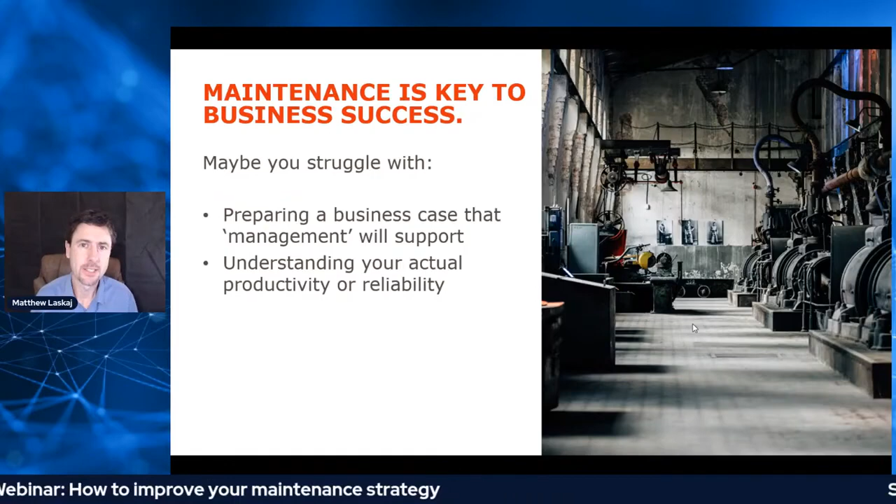So today we're going to talk about the importance of maintenance. We all know that a key to business success is having a good maintenance program, a good reliability program, or good strategy. Maybe you struggle with a few areas though - maybe it's getting the business case that management will support so you can set up your strategy. Maybe it's actually understanding how productive you are as a business or how reliable your equipment actually is. What I often find is people just don't know where to start. Starting can be the hardest part, so hopefully today's session will help you out with some of those things.

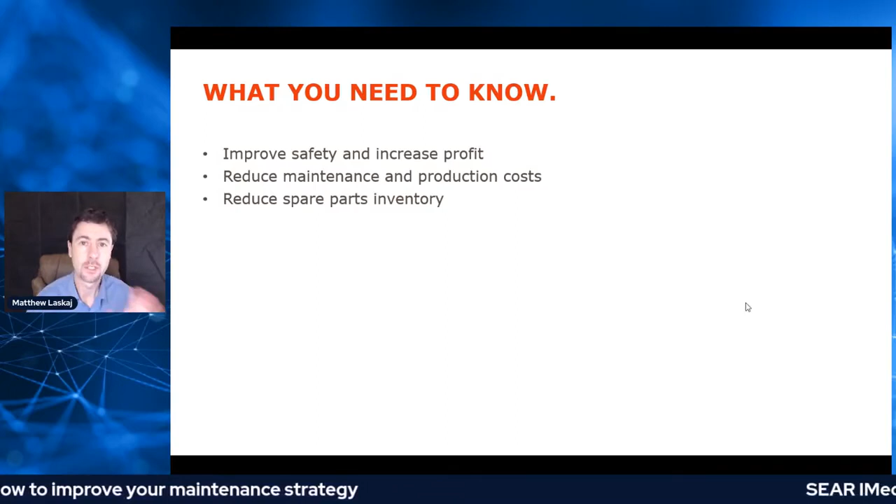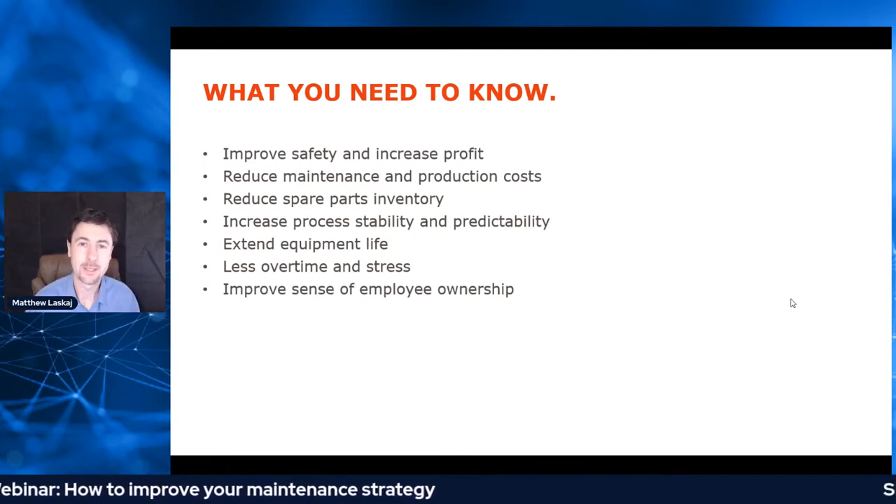The whole basis behind improving maintenance and reliability is you want to improve safety and increase profits, because if you're not increasing your profit, you don't have a business. You want to reduce your maintenance and production costs and also reduce your inventory - the more equipment you've got sitting there, the more it's costing you. So cost is a big driver of improving your maintenance. You want to improve stability and predictability of your equipment, because you want to know when you think it's going to fail or when the work has to be done. You don't want to be caught short. So we want to extend equipment life. Of course, we all want less stress in our life - overtime and unplanned work makes more stress, so improving your strategy will reduce your stress. And by getting a sense of employee ownership, it's important that workers feel like they're part of the team, feel like the equipment is theirs.

So there are two key areas I want to focus on: what are the building blocks or fundamentals of maintenance plans and maintenance strategy, and then how do you use that knowledge to build your own plan? Throughout the next 45 minutes, I want you to think about this question: what are 3 steps or 3 pieces of information that you get out of today's seminar that will help you master your own maintenance and reliability plan? I'm going to give you my 3 at the end, but I want you to think about the main 3 things you take away from today that you can put into your own maintenance plan.

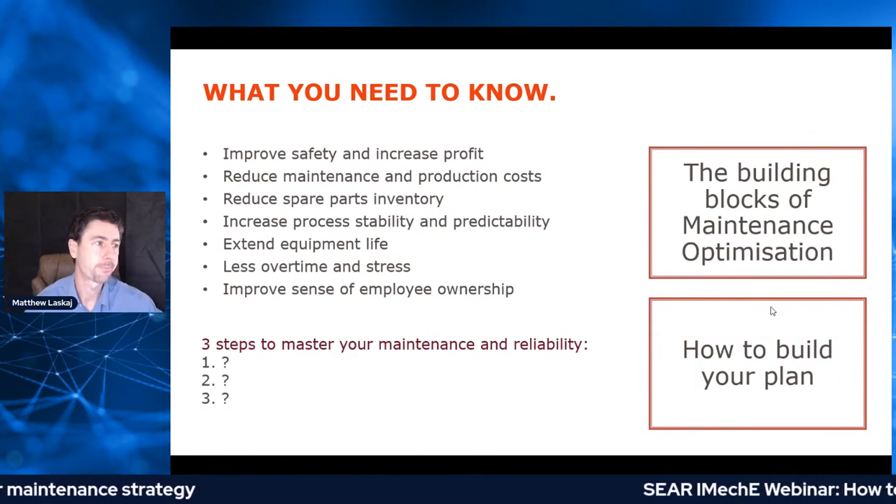First, have a think about the place where you might work, or somewhere you've worked in the past. Something breaks down, and for whatever reason, it's quite often on a Friday night or a weekend, or sometime when you don't want it to happen. All of a sudden, you've got a breakdown.

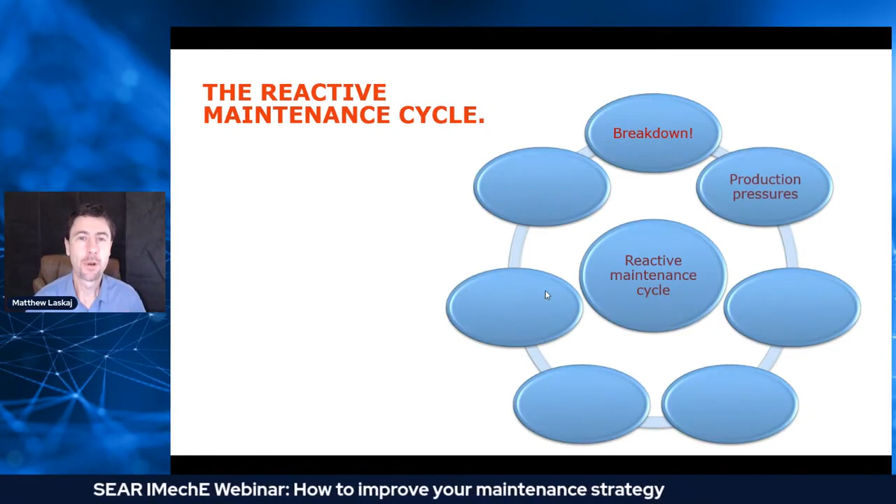Production's on your back to get it fixed. We need to get production out the door. We're losing money, get it fixed. Quick, quick, quick.

So the maintenance team do a really temporary fix, what we call a Band-Aid fix. They put a plaster over it, fix it quickly, get it up and running as quickly as possible.

So that makes them stressed. They're overworked because things happen at the wrong times and they're stressed trying to get it fixed quickly. That means the standards drop. They don't do work as well as what they could if they had more time and were planned better.

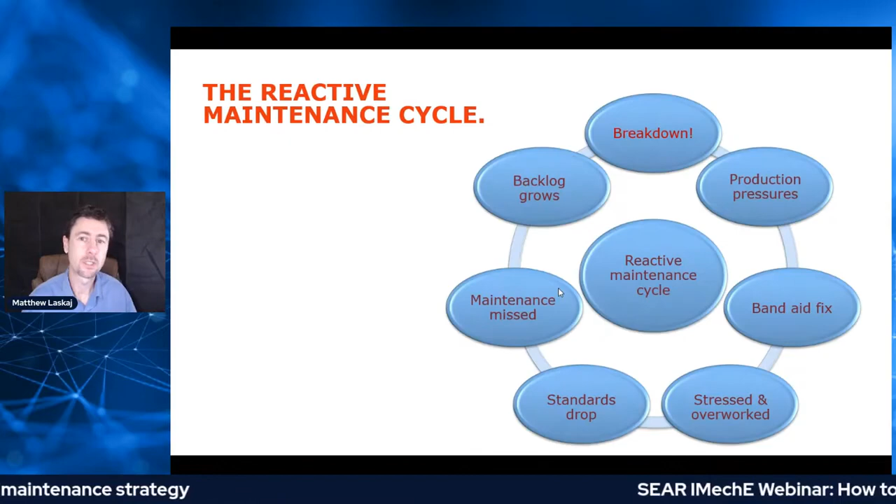And maintenance then gets missed out because you're spending all your time on the reactive maintenance rather than the planned maintenance. This means our backlog grows. Our planned maintenance backlog gets worse, which starts our cycle again, because if we don't do the planned maintenance, we get more breakdowns. What do we do about it? How do we get out of this crazy cycle of this reactive stress, running around with pressures?

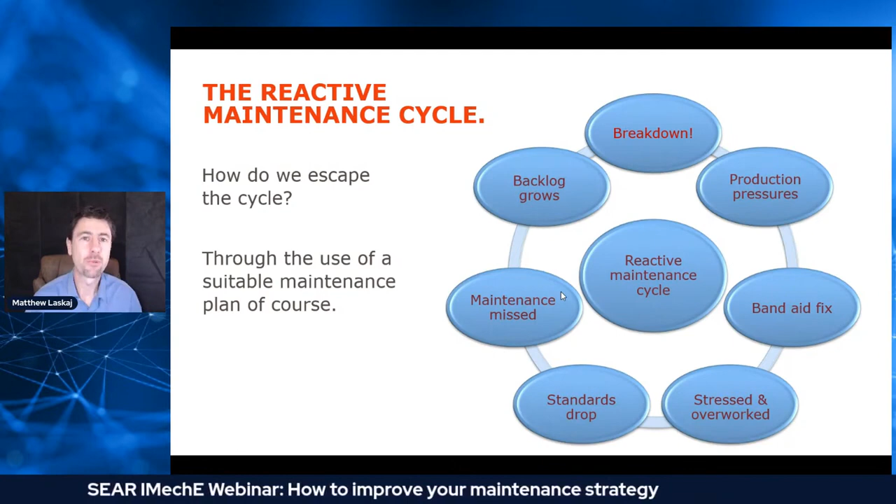You've got it. The whole point of today's presentation is we need to improve our maintenance plan. By having a good maintenance plan and the right strategy, we will help with this.

Let's look at it another way. In my experience working in manufacturing and refineries and offshore oil rigs and things, a maintenance manager's usually in place for about 2 years. They first come in and what do they want to do?

They want to look great. They want to do a great job. So let's cut costs, that'll make me look better. Well, we can't cut production costs because that makes us money. So let's cut maintenance costs because that's not making us money. In fact, no one's probably going to notice for a while. So they cut the spending.

2 years later, they're looking really good. Costs are down, failures haven't increased, stresses are reduced, less worries about it. So they get promoted. Then the next person comes in, and it's usually the supervisor.

All of a sudden, things start to break down. Now we're back into this reactive cycle where we've got stresses, production pressures, all sorts of problems going. What do you do to fix it? How do you catch up? Because the last person's cut costs, you can't ask for more money.

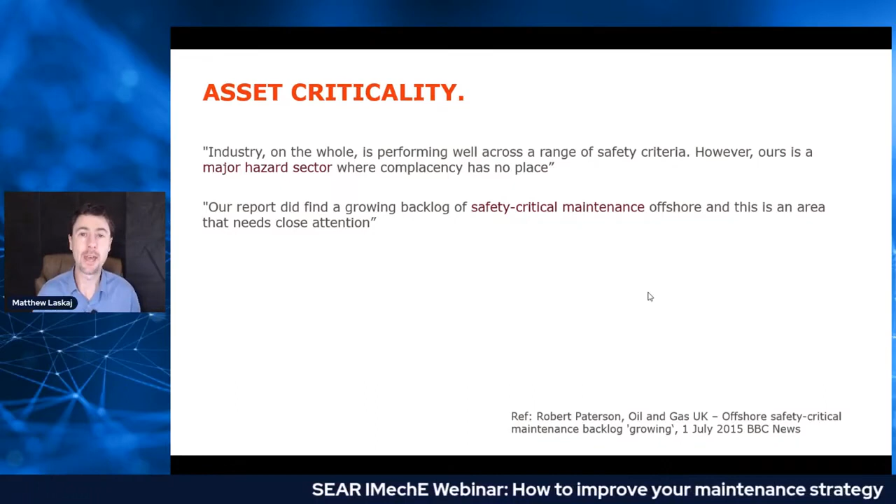Is that a problem? How do we make sure that our equipment is maintained safely when we've got cost pressures, time pressures, staff pressures? The answer is to have a good management system. We need to assess the risk, make sure that the right people are involved and talked to - technical people, engineering people, but don't forget the actual engineers, maintenance and operators on the shop floor.

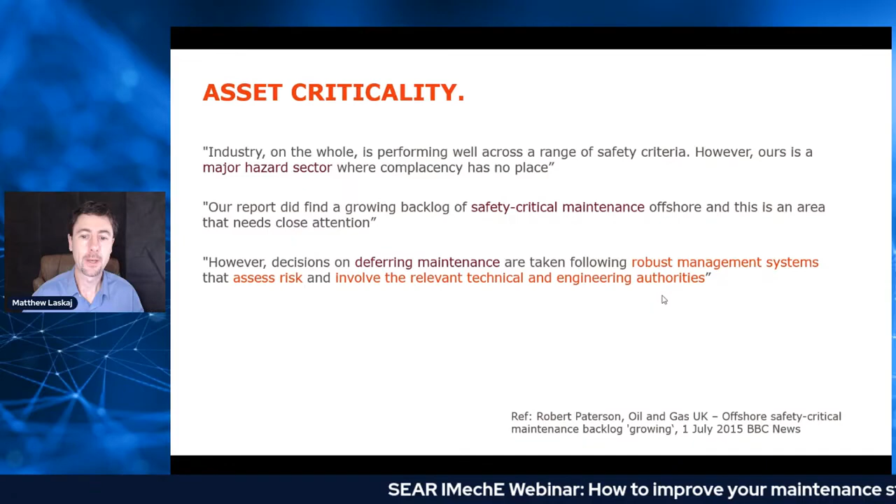Okay, so good strategy: assess the risk, involve the right people, make the decisions. We can absolutely defer critical assets as long as we make sure that we do it in the right way.

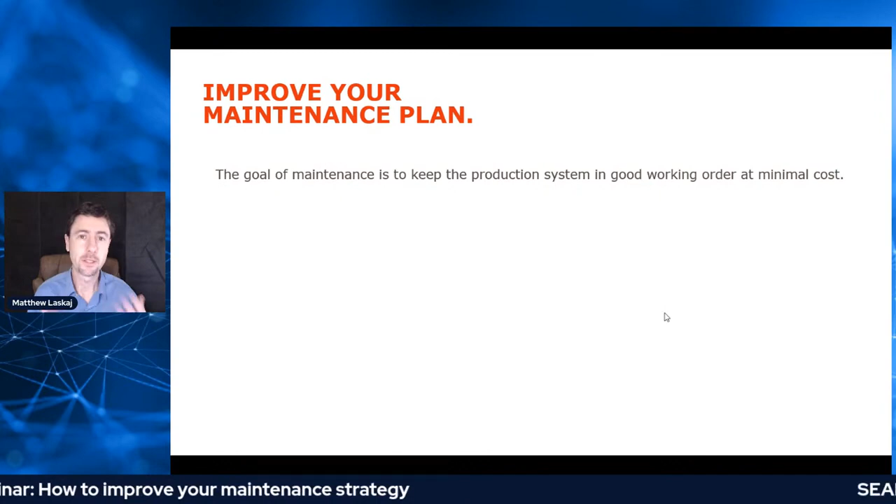So on to how we improve our maintenance plan, the whole point of today's topic. The goal of maintenance, in my opinion, is to keep production running in good working order at as low a cost as possible. So we want to keep it doing what we want it to do, but without spending too much money.

There's two parts that go into that. There's the technical actions, so the person on the tools, the person doing the physical work. And then there's all the administrative actions that go along with that - the paperwork, the planning, the scheduling, recording of failures, recording of work done. Those two go together to help us achieve our aim of retaining the item, or restoring the item back to that state that it can perform its function. In other words, back to the point where it does what we want it to do, as cheap as possible.

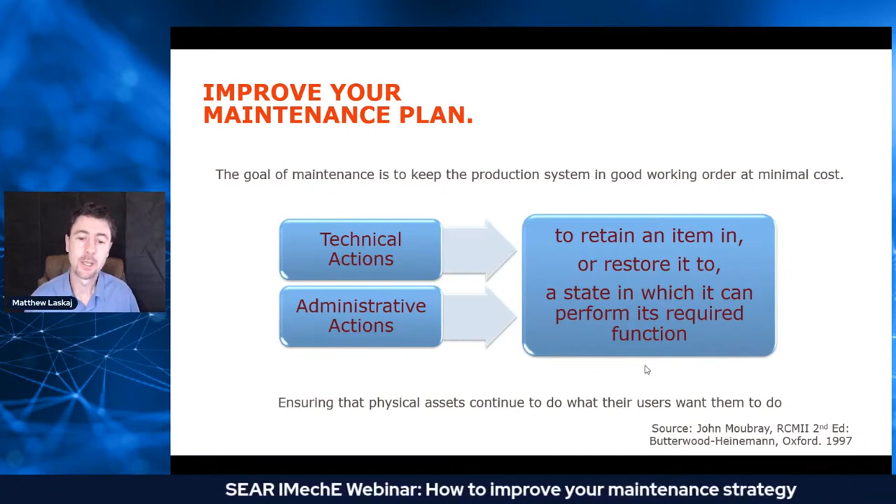There's a really good definition by a well-known reliability expert named John Moubray. He says that maintenance and reliability is ensuring that the physical asset continues to do what the user wants it to do. So you need to decide what it is you want your asset to do, and make sure your maintenance plan helps it continue to do that as cheaply as possible.

So let's go back a little bit. Think about the early 1900s. What did equipment, manufacturing and plants look like back then? They were slow moving, really over-designed, over-engineered, didn't fail very much. There wasn't a lot of pressure on manufacturing and production to get products out, so life was pretty easy. If something broke down, no problem, let's just go out and fix it. If it's not broken, don't fix it.

Then everything changed. World War II came along. All of a sudden the pressures skyrocketed. Companies like Ford went from making cars to making military equipment and munitions. What happens if you don't get equipment out the door quickly now? What happens if your designs and equipment fail? People end up dying. So the consequences rose, so the pressure rose. So now we can't just wait for things to break down, we need to try to make sure it doesn't break down in the first place.

So we've moved to this overhaul understanding - make sure we overhaul it, or remove it, or replace it before it breaks down. Then as we moved on, our thinking got a little bit more advanced, and we thought, well, why are we replacing it if it may not need replacing? Let's monitor the condition, let's do some kind of inspection or listening or feeling to see what the condition's like. If we think something's wrong with it, now replace it. Sounds more logical, doesn't it? Don't replace it if you don't need to.

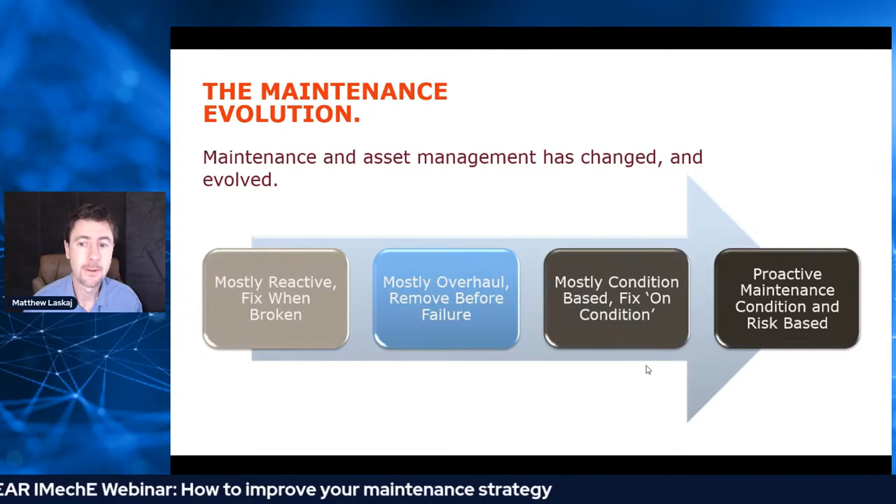As our risk and environmental and safety priorities have changed over the last 20, 30 years, due to some big incidents in particular, we're now trying to be more proactive. We're trying to base it on risk and condition and what we think is the best scenario. What's the consequence of the failure? How do we manage that? So our thinking of maintenance has evolved over the last 100 years, from only fix it when it breaks, to let's try to be more proactive.

But it can still be any of those options. So really we have a choice of options as a maintenance professional to choose from. We can choose a reactive breakdown, run to failure option. We can do preventive, planned maintenance. We can try to be more predictive, trying to do some condition monitoring. There's something called total productive maintenance, which Toyota was particularly instrumental in developing. Then we look at some of the more risk-based things, so reliability-centered maintenance and risk-based maintenance.

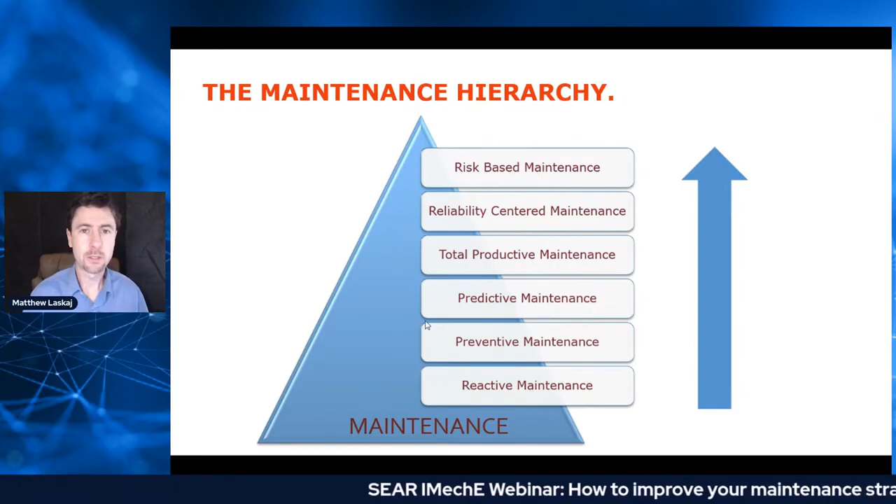So what I want to do is go over some of these just to give you an idea of what our choices are as maintenance, engineering and reliability people. So what I've done - I saw this from somebody a while ago - is use the car to try to represent the era where this thinking was, and try to put some picture to the concept.

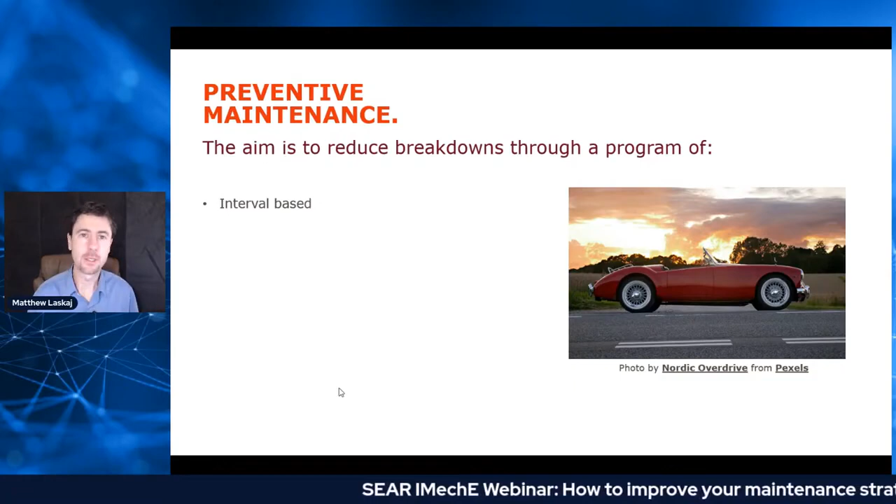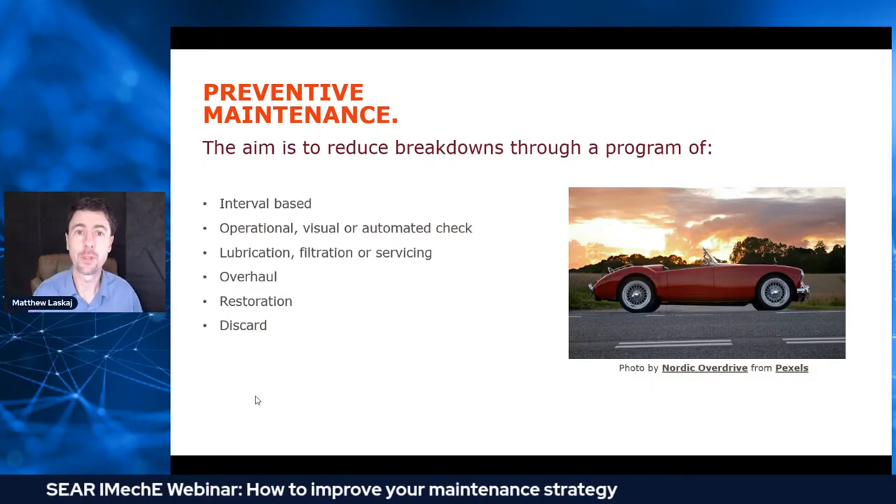The next one's planned or preventive maintenance. We want to try to reduce the number of breakdowns by doing some interval-based work - daily, monthly, six monthly, yearly. We do some work before that equipment breaks down. It can include visual checks, changing oils, changing filters. Think about your car - you go and put your car in for a service once a year. The idea is to try to stop it breaking down by changing oil and spark plugs and filters and things. We can overhaul it, rebuild the engine if we think it's getting old, or we might throw out the car altogether and buy a new one before the car fails, because the purpose of the car is to get us from A to B.

That's why every 12 months we change the oil on our car, because the life of oil is about 12 months depending on how much we use it. After 12 months, it starts to deteriorate and there's a chance that we're going to fail some other components. So we change it at 12 months.

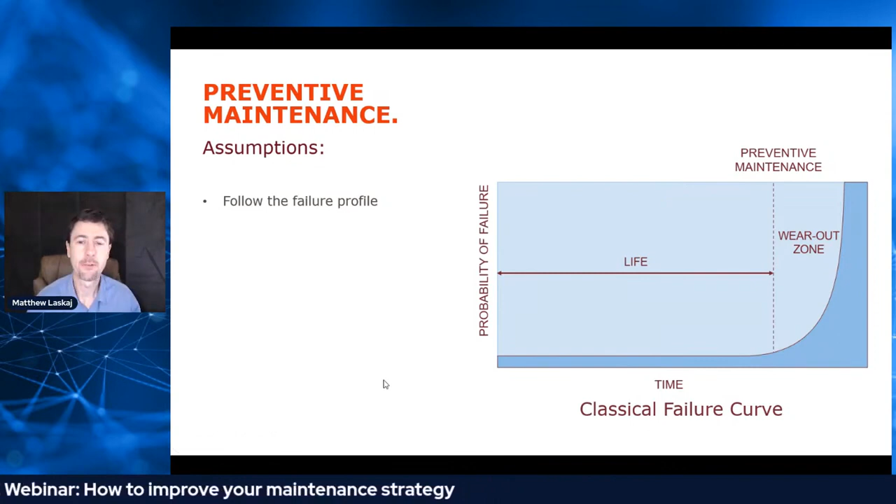But there are some big assumptions that we make when we're doing this. The first one is that the equipment we're maintaining follows this profile, that it's a pretty low chance of failure throughout its life, and then it starts to wear out. Failure statistics are available - it assumes that we actually have good information to build our graph, and that our equipment is average.

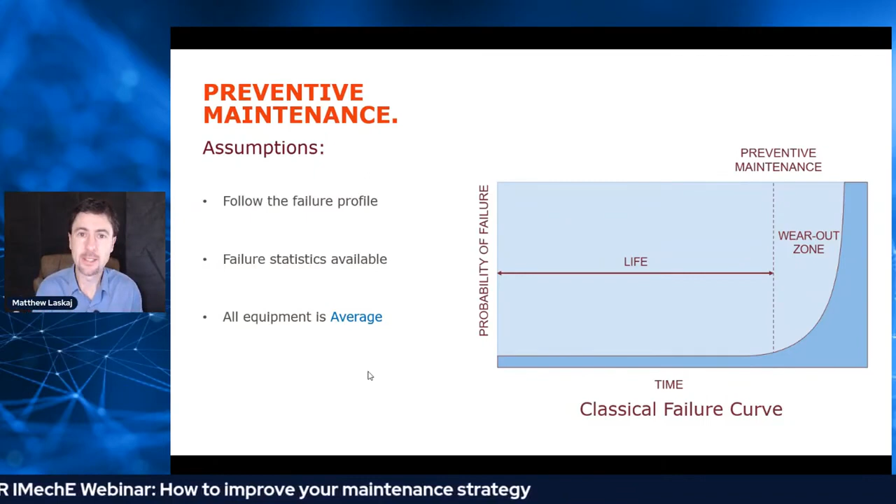If I have two pumps sitting in the same building, one week on, one week off, rotating, I'll guarantee you that they will not fail on the same week. Even though the equipment's the same, the conditions are the same, the fluids and the process are the same, not every piece of equipment is average. Now what happens if I've got one pump inside and one pump outside? That's even worse. So we're making some big assumptions when we're using planned maintenance.

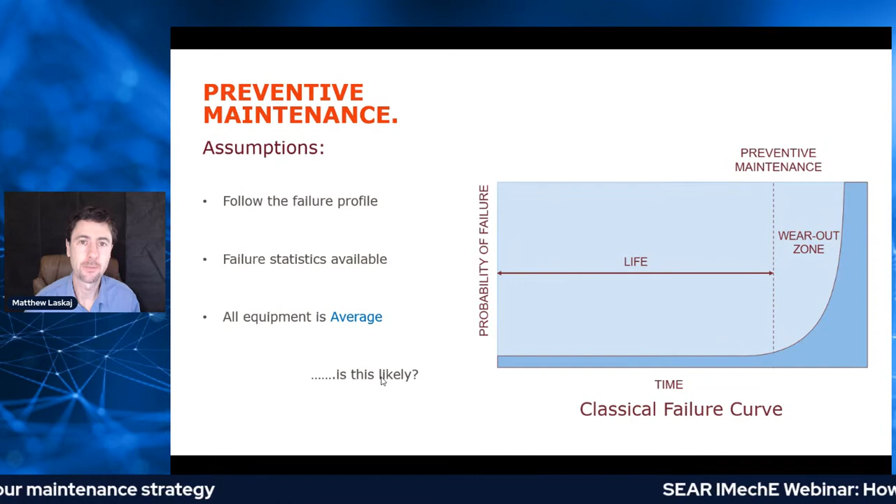How likely is the equipment that you have going to follow this information? So is planned maintenance the best option? Have a think about that.

So I want to tell you a story. Let's go back to the 1960s. The airline industries were starting to boom, and the aeroplanes weren't as reliable as they could have been or should have been. So United Airlines thought, I want to improve the reliability of my aeroplanes. How do we do it?

If something's unreliable in your plant, what do you do? If something breaks down, what do you do? We do more maintenance, right? We schedule in more overhauls, more inspections, more changeouts. So that's exactly what they did. They did more work, they put redundancy in, they made things heavier, they put two or three versions of backups in.

Solved, right? No, it was not. They actually found that not only did it not improve, but some parts got worse. How's that possible? We do more maintenance, we put more backups in, and it gets worse. So they hired two people to come and do a study, and what they found was that all of the equipment in the airlines followed one of six failure profiles.

A, the top one on the left there, is the one I just went through, the classical failure profile - as life goes along, it's quite random throughout, small chance of failure, and it then increases as it gets longer into its life. B, pretty unreliable right at the start of its life, pretty good throughout its life, and then higher probability at the end. C, it just gets a higher chance of failure the longer you go. D, pretty good at the start, not so good throughout its life.

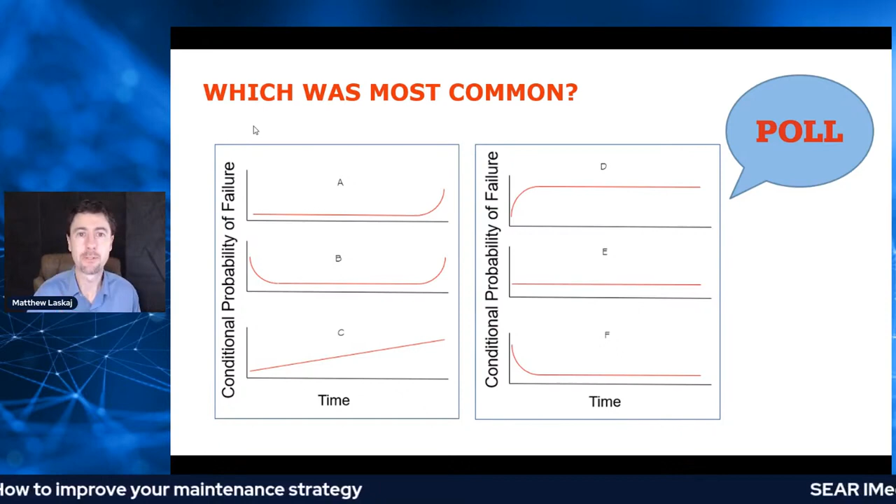E, random throughout - almost think about a light bulb for this one. You could turn the light bulb on the first day and it doesn't work, it could run for two years and then fail. You just really don't know when it is, and there's not much warning sign. And F, pretty good at the start of its life, pretty bad at the start of its life, and then random throughout.

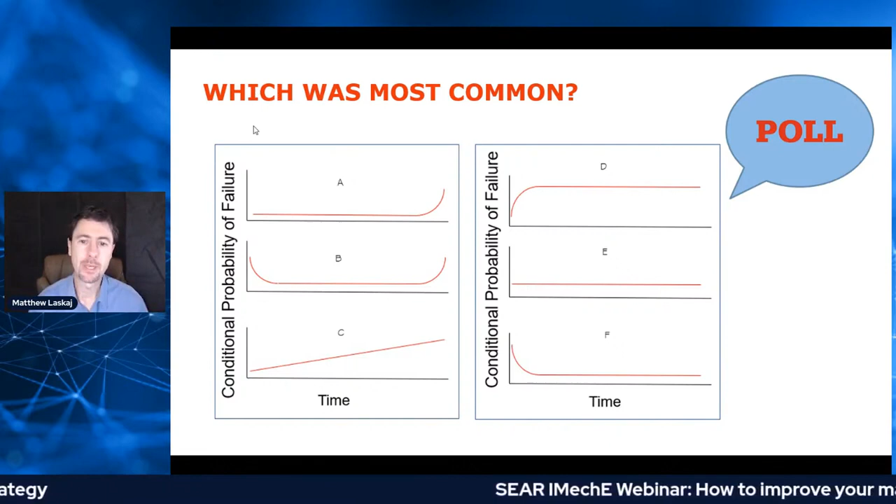So what I'd like you to do is, in the chat box, if you're on YouTube, or on Facebook, or logging in another way, tell me which one out of those six options you think they found the most. So if everyone wants to stick something in the chat, A, B, C, D, E, or F, which one do you think they found was most common?

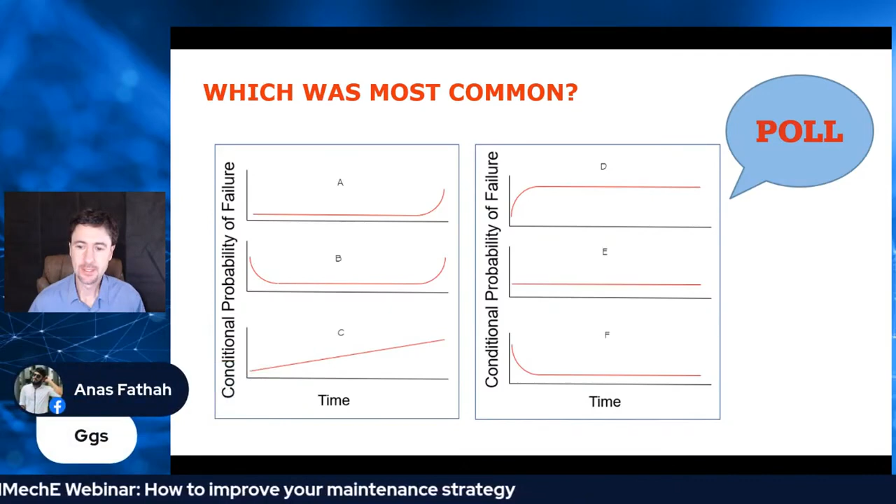Anyone on the YouTube? Just check the YouTube stream. I've got a couple coming in on YouTube as well. Excellent, thanks Daisy.

Shah, D all the way. That's a pretty confident call out, Shah.

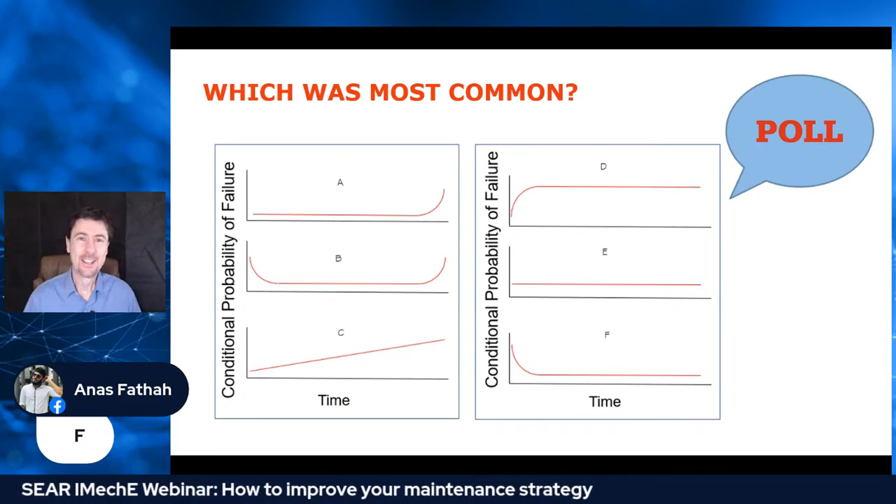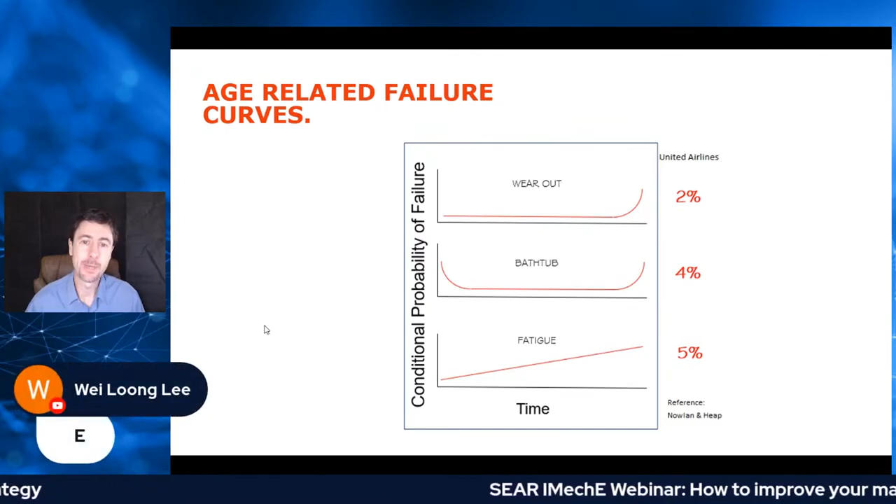So what I'm going to do is share the results, and the results may surprise you. A, 2%. 2% of failures followed that classical failure profile that I showed you. 4% is B, 5% is C. If we add all of those together, only a total of 11% of failures occurred or followed what we call age-related profiles, where it's pretty good throughout its life or pretty random throughout its life, and it gets to this wear-out zone towards the end.

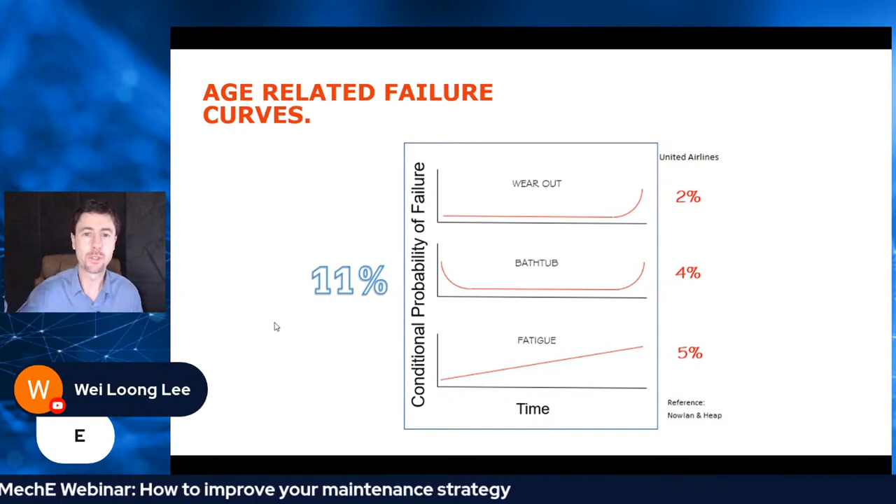Not just airline industries. The Navy did this study on submarines. Slightly different profile because the risk of submarines is much more than manufacturing, for instance, but pretty close.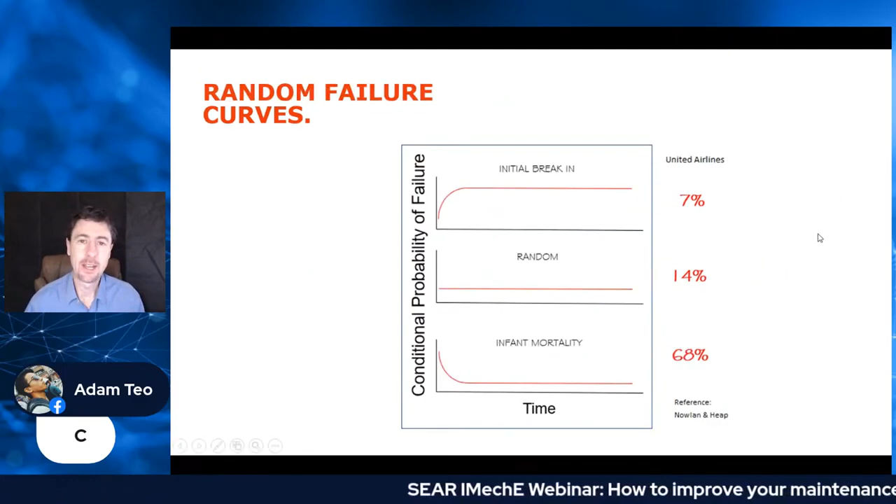68% F. So if you chose F, so Daisy there, well done. A few others chose F as well. I'll give you a gold star later and you can stick it on your fridge and show how clever you are. 68% of profiles followed what we call an infant mortality profile. Right at the start of its life is the highest chance of failure. Once we get into that, a couple of time periods later, it's more or less random and lower.

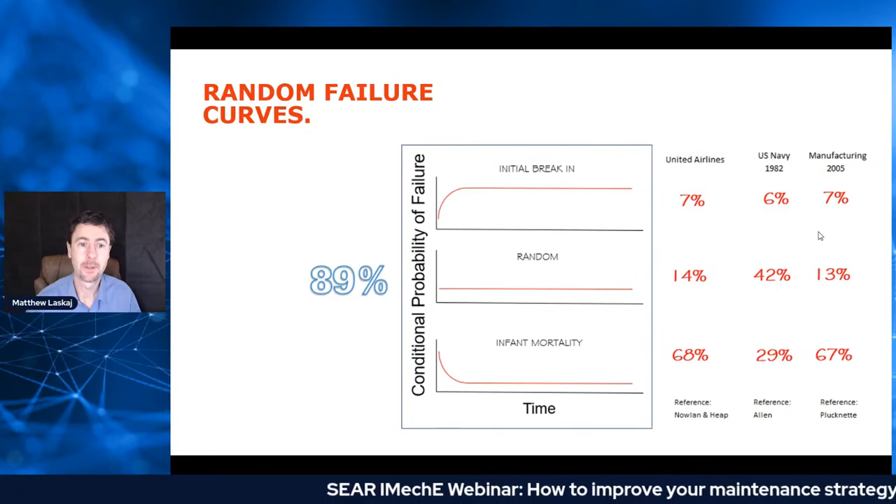89% random failures if we add all of these up. And again, it's not just the airline industries. The Navy was pretty similar, manufacturing pretty similar. So 11% of failures occur in this age-related profile, 89% random.

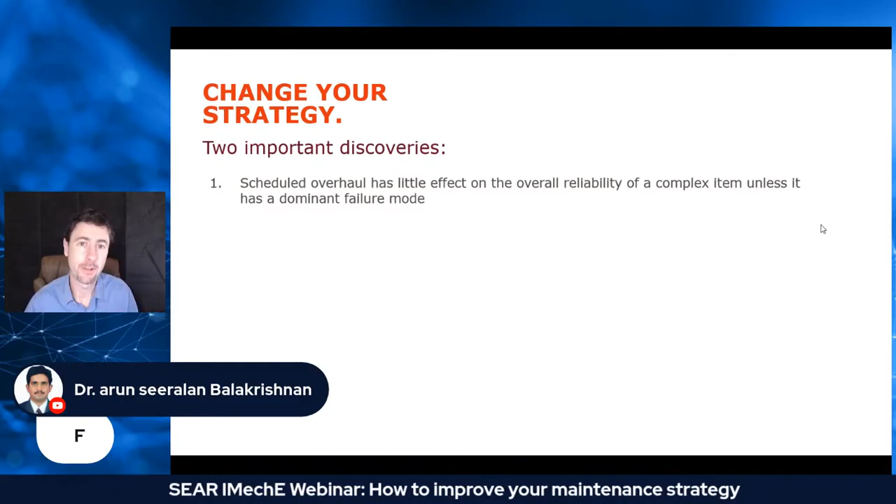Two really important discoveries came out of this study from the airlines. The first one is, because most failures were random, doing a scheduled overhaul really doesn't help much, because you don't know when it's going to fail. So when do you schedule it in?

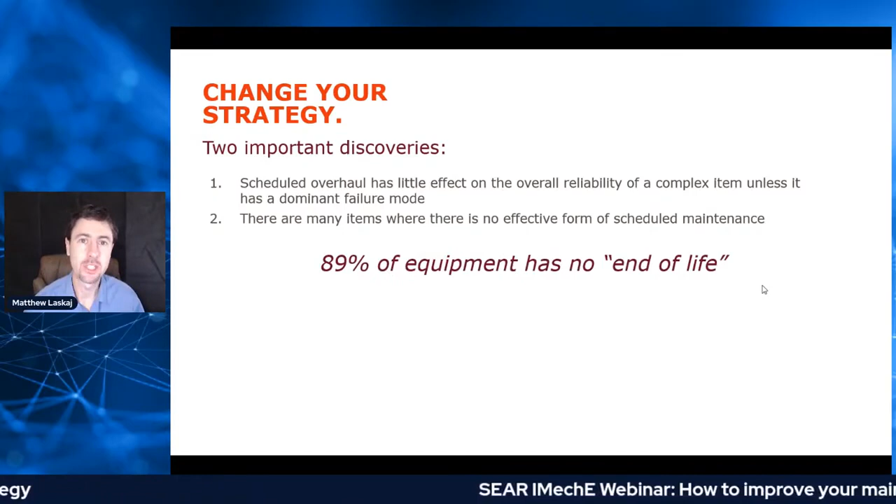There's a lot of items where there is no effective form of scheduled maintenance. If you don't know when it's going to fail, how do you know when to do the maintenance? If I maintain it today, could it fail tomorrow? If I maintain it today, I'm introducing a higher likelihood of failure tomorrow because of that infant mortality curve. So most times, equipment doesn't reach the end of its life because it gets changed out because something else causes us to change it.

Avoid any unneeded maintenance. Do not do maintenance unless you have a good reason for it. Just because things are failing, don't default to doing more maintenance without thinking about it first, because we increase the chance of failure back to the start of its life.

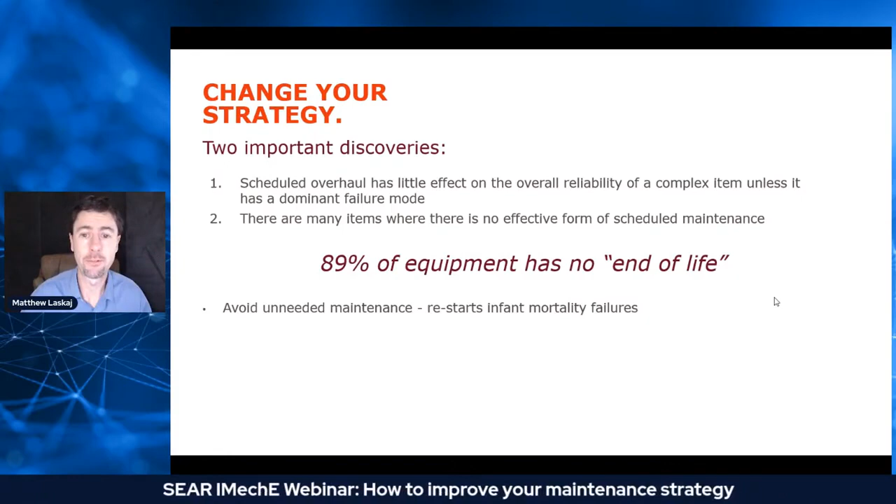We could install it wrong. We could have stored it wrong. We could have transported it wrong. We could have used the wrong equipment. It might not fit. There's a whole lot of reasons why it's there.

Monitor the condition as much as possible to detect when the failure is going to come, and then use your engineering understanding to decide when it's going to be changed.

Asset management, or in particular ISO 55001, tells us what we should do. It gives us a good understanding of what we need to do to develop a good strategy, but it doesn't tell us how to do it. We need to know how we can do it by designing better, buying and storing better, installing better, operating and maintaining better. These are the things we need to improve reliability.

So I spoke about condition monitoring and prevention as much as possible. This is what we call predictive maintenance. Condition monitoring sort of forms part of that predictive maintenance. It can include visual inspections, so just looking at the condition, walking around, doing a walkthrough once a day, once a week.

We can do some vibration analysis with some probes. We can do some ultrasonic testing, UT testing, to check thickness. Check the oil condition - what's the oil like? What does oil tell us? We can check it with infrared, so thermography. We can do some non-destructive testing.

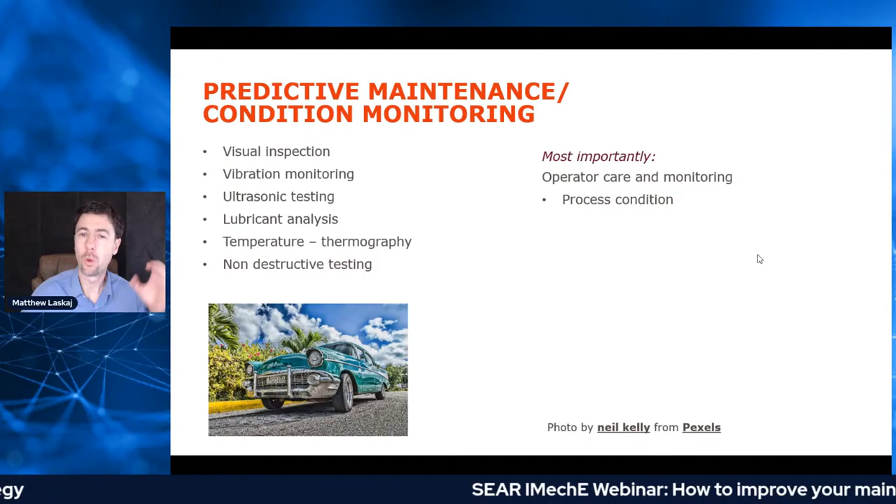There's a whole lot of different ways where we can check the condition, so we're not changing things for the sake of changing them. But the most important thing, in my experience, is to get the operators and the maintenance teams involved. It's what we call operator care. They work on the equipment every day. They know what's good, what's bad, what doesn't sound right. They can monitor the processes just by doing their normal jobs. They can check equipment condition because they know what's not right.

If you drive your car, you'll know that something's not right. You take it to a mechanic - will they be able to tell the same thing because they've never seen your car before? Look, listen, feel, smell. You can detect a huge proportion of things without fancy technologies, fancy equipment. But make sure that you have it planned into your strategy.

Proactive maintenance - let's get a bit more proactive than even preventing a failure. Predictive maintenance tries to detect when a failure has occurred, and we know we then need to change it. Why don't we try to just eliminate the failure in the first place so we don't even have to do the maintenance at all?

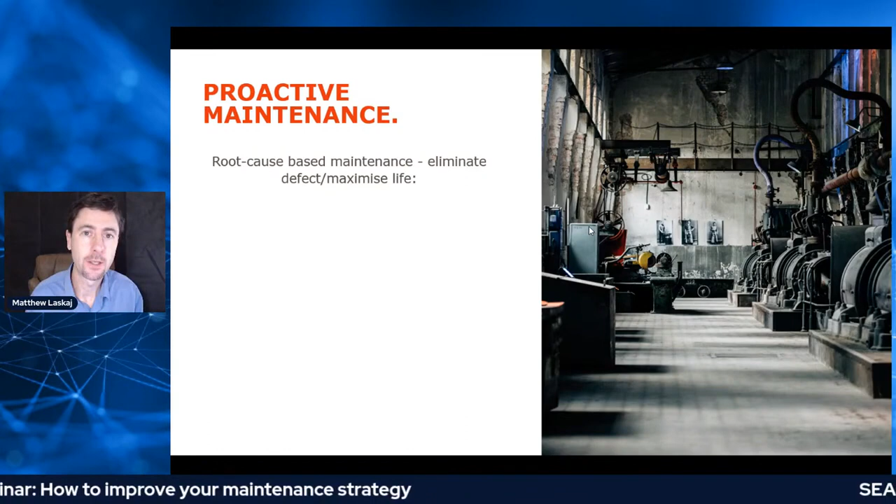So this is where we're looking at eliminating defects. We can use root cause analysis, root cause based maintenance. We try to find what is the real reason the equipment is failing. Now let's eliminate the defect - let's make it last longer by stopping it failing in the first place.

Remember I said before that a lot of traditional maintenance, so reactive and planned maintenance, achieves nothing, and some actually makes it worse. So by looking at proactive ways, we're not going to waste our time doing maintenance that does nothing or makes it worse.

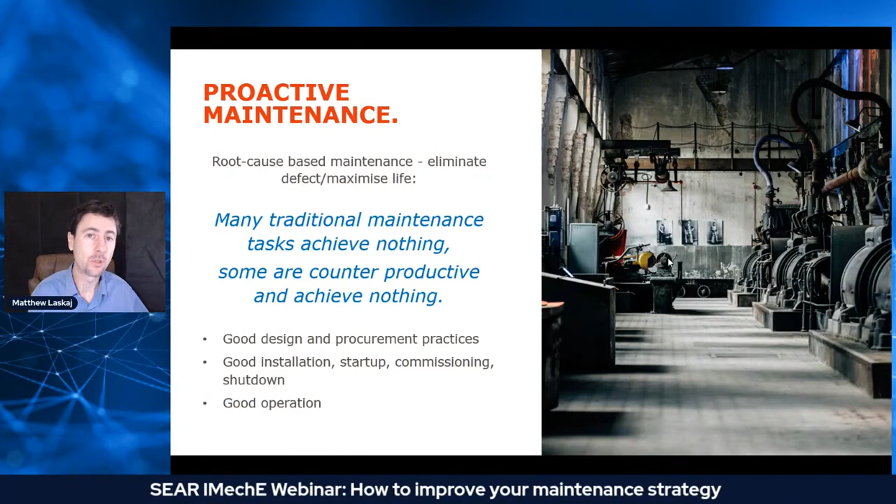Have good processes, good design. And it doesn't start when you start the on button, it starts when you're designing the equipment. Install it, start up, commissioning, shut down, good operation, good training is critical to having a good maintenance plan.

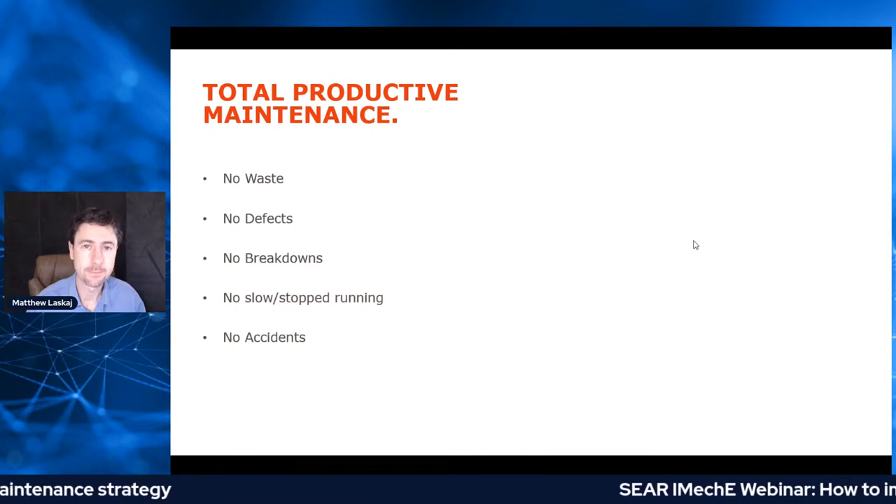And that's where what we call total productive maintenance comes into it. This started in Toyota in the 70s and 80s, became big. The focus here is on no waste, lean manufacturing - no waste, no defects, no breakdowns, don't run slow, don't stop, and more importantly, no accidents. This is zero defect philosophy.

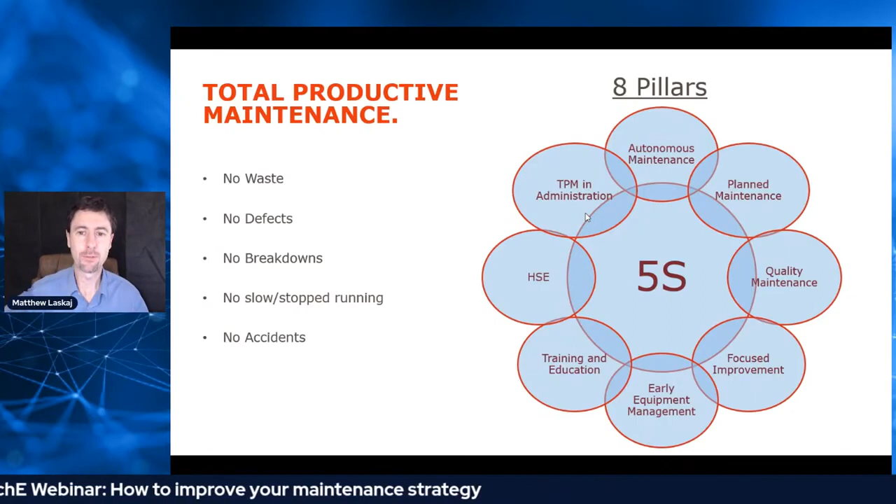And it's sort of centered around these 8 pillars, with 5S in the middle. For any bonus points, can anyone name what any of the 5 S's are in the chat box? As you're doing that, the 8 pillars include autonomous maintenance - making sure the operators are doing what they need to do to help out - planned maintenance, good quality, focused improvement, training, health and safety. All of these things is what we're calling total productive maintenance, involving the people doing the work, the operators and the maintenance.

So for those of you who are thinking about what the 5 S's are, it's Japanese words - I'm going to do the English versions instead of the Japanese versions: sorting, shining, standardizing, all of these things which make us be able to detect that there's something wrong. If you keep your equipment and your workplace clean, you can see when there's a leak, you can see when there's something missing. It's important to get the basics right.

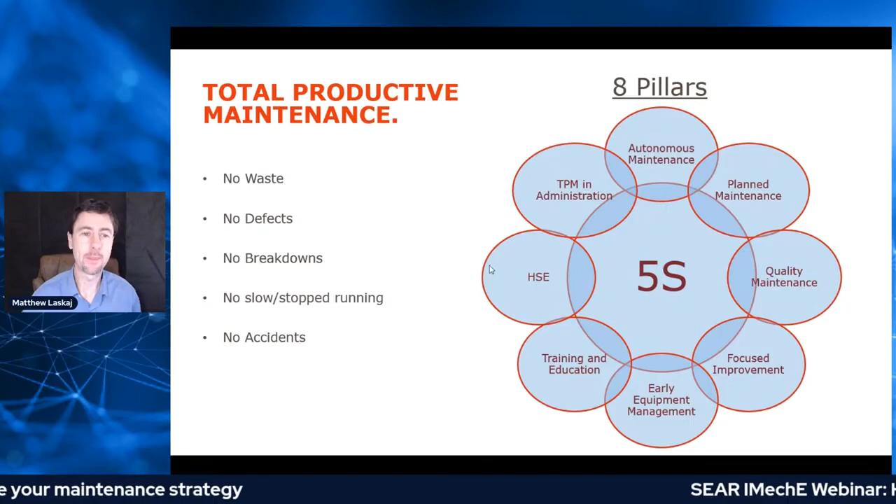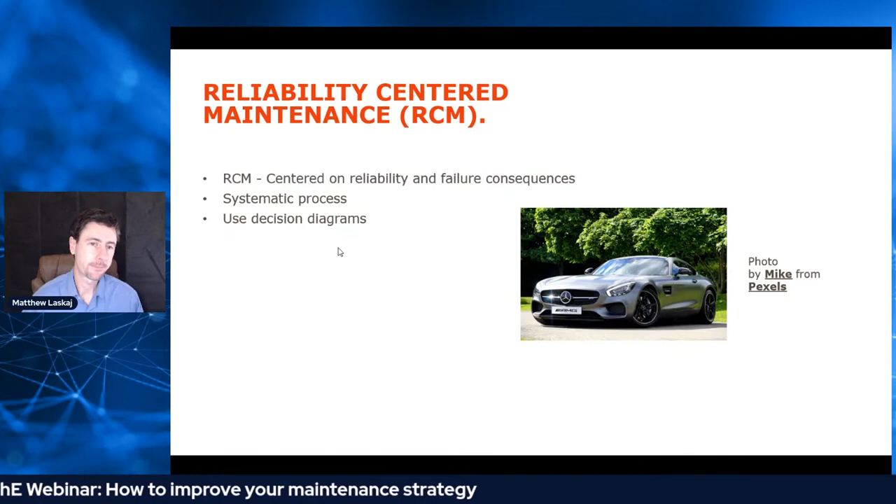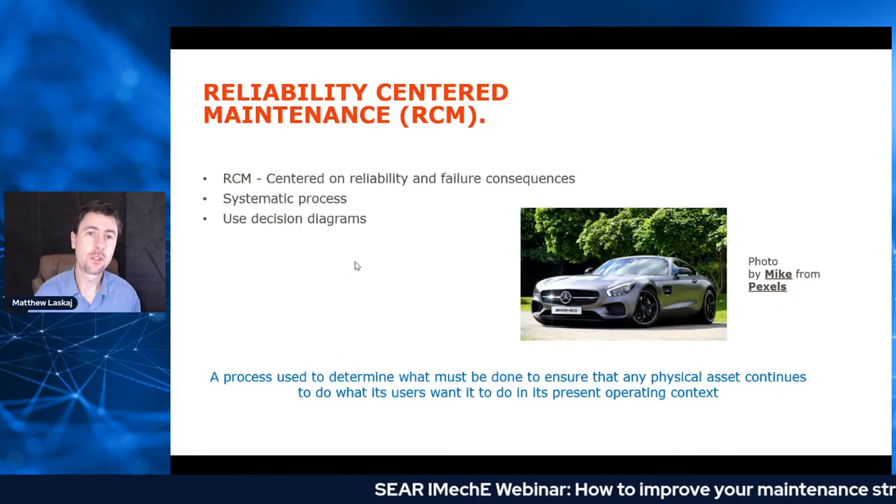The thing that came out of the study from United Airlines is what we call reliability-centered maintenance. It's a process, okay? It's not another technique - it's a process and a decision diagram that helps us make better decisions with the information we've got. It helps us determine what we need to do to make sure our asset continues to do what we want it to do in its current condition.

So this is again from John Moubray's definition of reliability, and it asks us 7 questions. It's a process map, process diagram. What is the function of the asset? What is it meant to do? How can it stop functioning in the way we want it to do?

In what way can it fail? What causes that failure? What's a potential cause of that failure? What happens when that failure occurs? Safety, environmental, production - they're the 3 things that we care about when a failure occurs. If all 3, then you're in real big trouble.

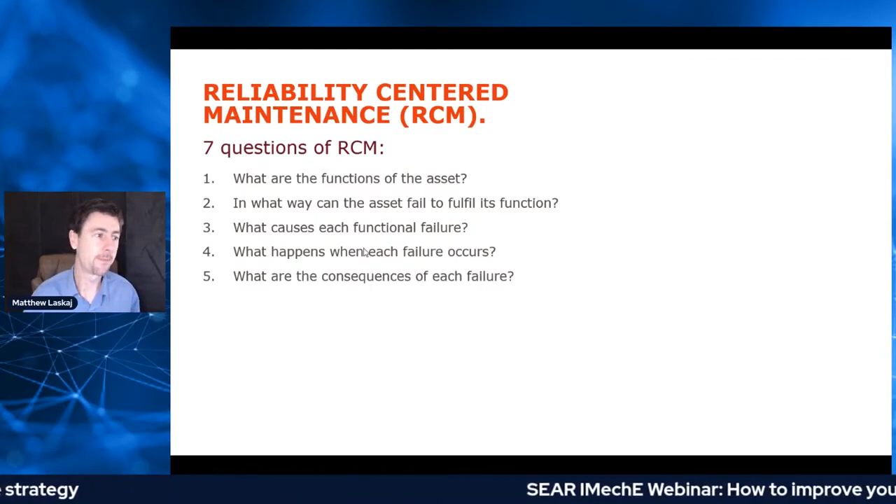What's the consequence of that failure? Does it cost us a lot of money? Do people get badly injured? Do we have an oil leak to the ocean? What can we do to prevent the failure from happening in the first place, or predict when the failure is going to occur so we can plan it in? If we can't do either of those, what else can we do? We might need to redesign it.

Collect the information. And this is why planned maintenance doesn't always work so well. We don't have good information. We need to get better at collecting information. Failure history. How many times have we changed it? How much work have we done on it? How much does it cost?

Then we work out the risk. Risk is consequence times probability. We then rank the risks from highest to lowest. Some criticality analysis. Based on the one that gives us the most pain, the most grief, we build in a plan using RCM if we really have high criticality, or maybe just using our engineering knowledge.

The continuous improvement cycle: plan, do, check, act. We always have to keep evaluating, monitoring, reassessing and improving. So we may need to go back and do that process over and over again.

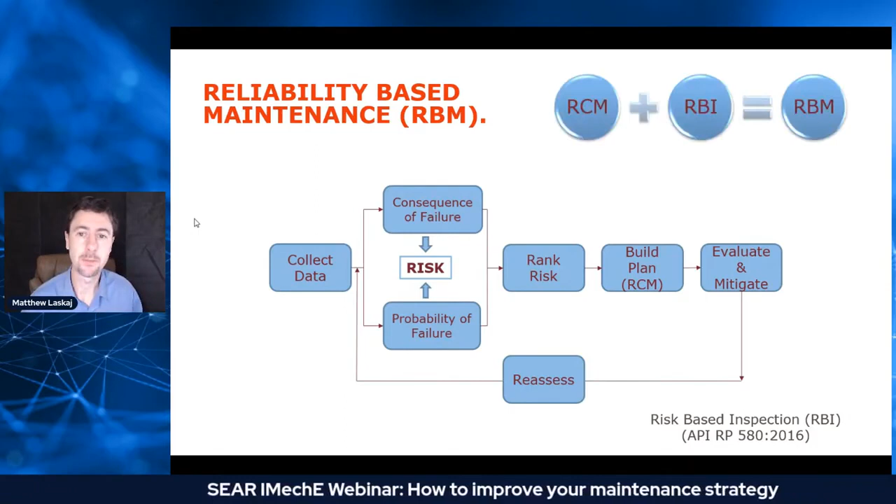Okay, so this is what we call part of the risk-based process. For those of you involved in risk-based inspection, there's an API standard there, mainly to do with thickness of pipes and pressure vessels. How long is fitness for service going to last? What is the risk? So if we can combine reliability-centered maintenance and risk-based inspection, we get what we call risk-based maintenance.

So, all sounds good in theory, right? Very easy. We can set up some plans. We can look at our history. We can do root cause analysis. We can do all these fancy techniques and tools. But what does this look like in real life? It's going to take a lot of work to do.

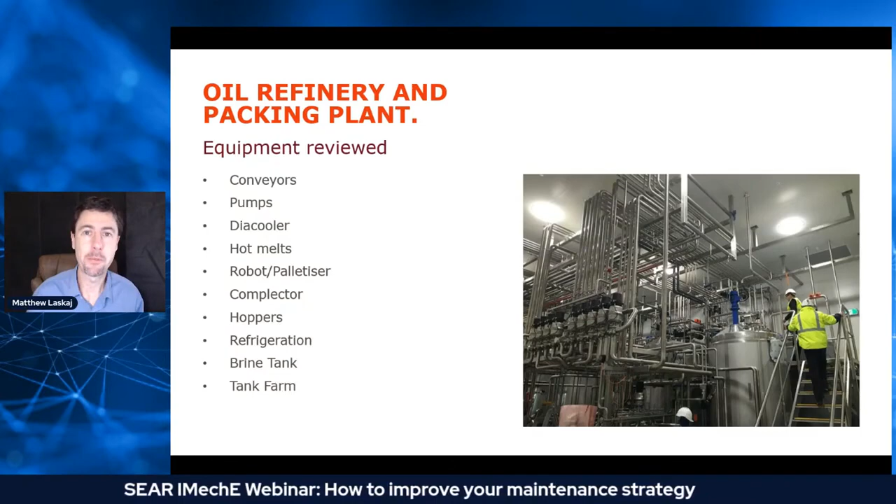So how does that affect our end plan? If we're going to spend more money, think about our maintenance manager. The person you've just replaced has cut costs. They've done such a good job, they've been promoted. You've come in. How are you going to ask for more money? How are you going to improve the maintenance?

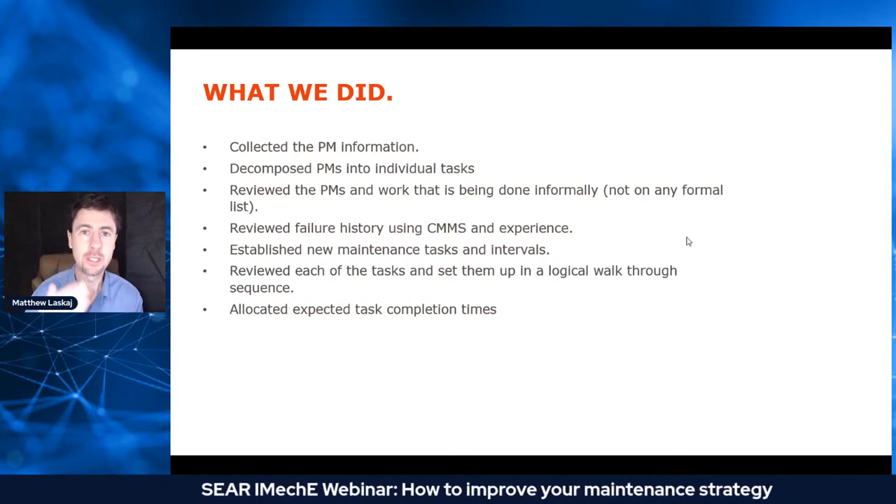So I worked in an edible oil refinery and packing plant, and we put in a new reliability program. We revised and looked at every single piece of equipment in the entire plant with the aim of improving safety, predictability, efficiency, and of course profit. So how do we do it?

We collect all the information, the planned maintenance information we've got in our computer, on walls, in people's heads. Collect everything, break every single task down into individual tasks, because quite often they're grouped together.

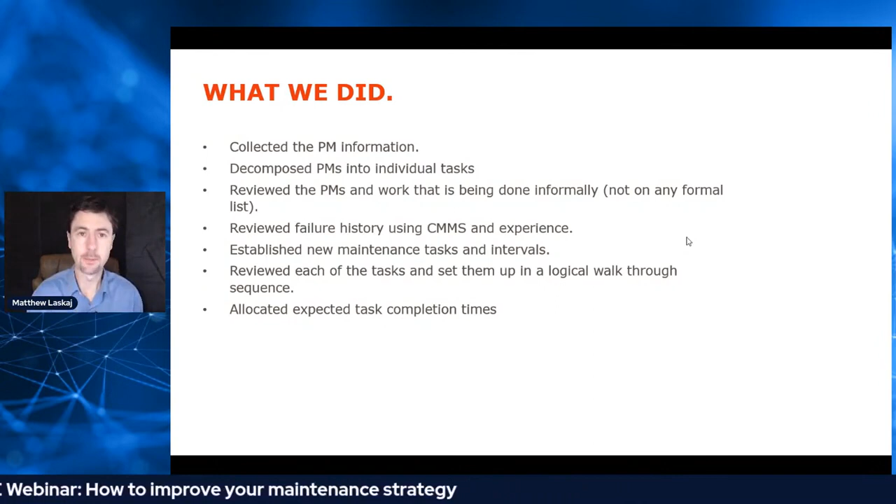Review what was done as a group. It's really important to get more people in the room than just me or you. If you get the maintenance technician, the fitter, the electrician, the operator, a supervisor, a manufacturer, all of these people in a room and say, right, here's a piece of equipment, go through the questions: How can it fail? What's the function? What's the consequence? What should we do to prevent or predict it? You're going to get a much better result than one person sitting there. So get a team involved.

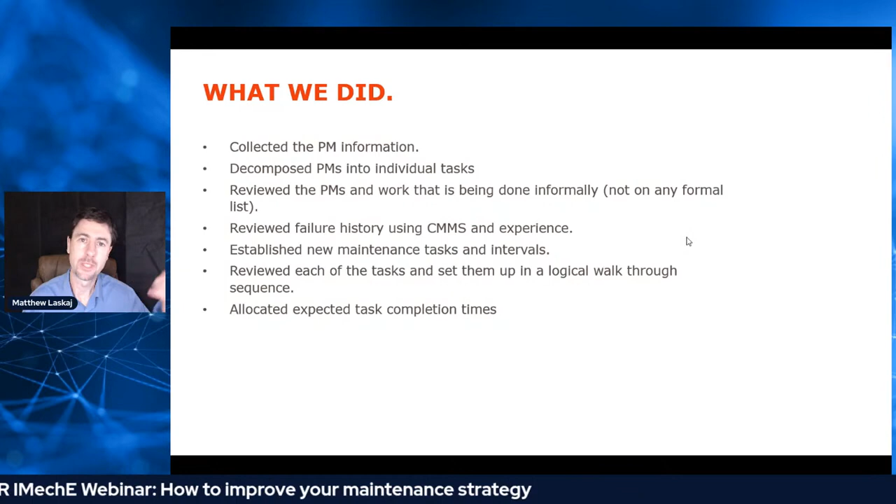Put together new tasks. Review them. Put some plan in place so that they walk through the plant doing them in sequence, and make sure you put times against them.

So how did that help? What was the end result?

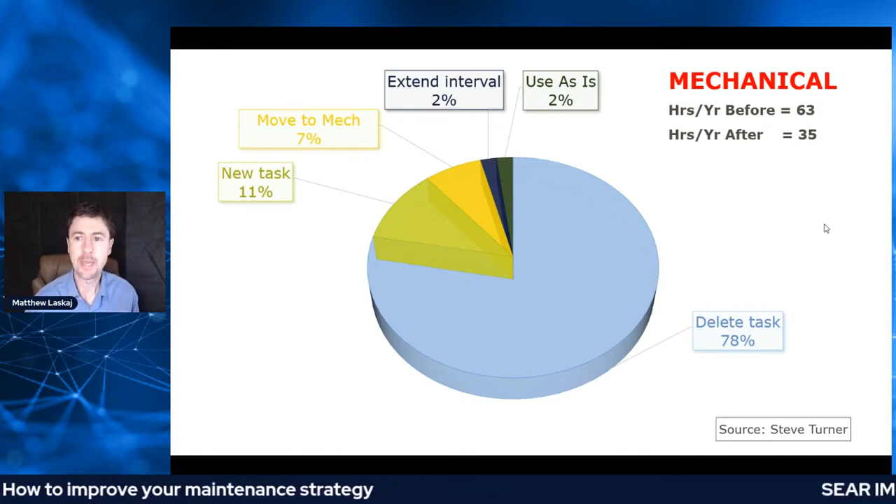One production line that I worked on, just for the mechanical tasks: 63 hours per year of mechanical maintenance tasks to maintain that line. After the review, 35 hours was the total. We nearly halved the amount of work planned on that production line. 78% of tasks we deleted completely.

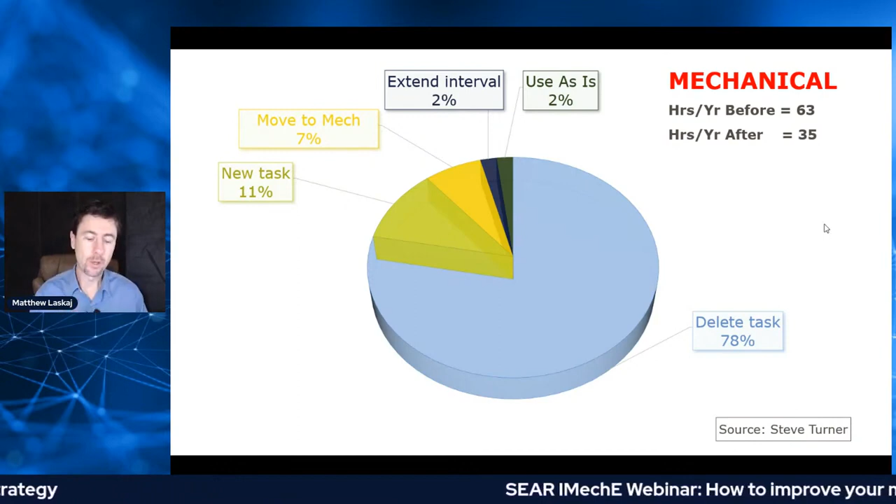How can we delete so many tasks? For how many years has this plant been running? They've been doing 78% of tasks that have wasted their time because we don't know the failure profile. We don't have good history. It's random failure, not age-related failure. The thinking is completely wrong. So delete them.

11% new tasks, the right tasks. That's the critical thing. It's not just about cutting tasks, it's about making sure the task does the right thing.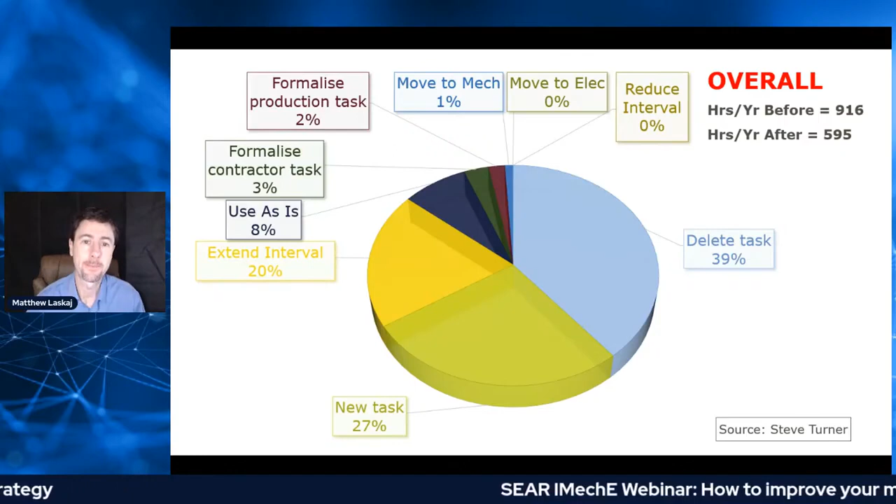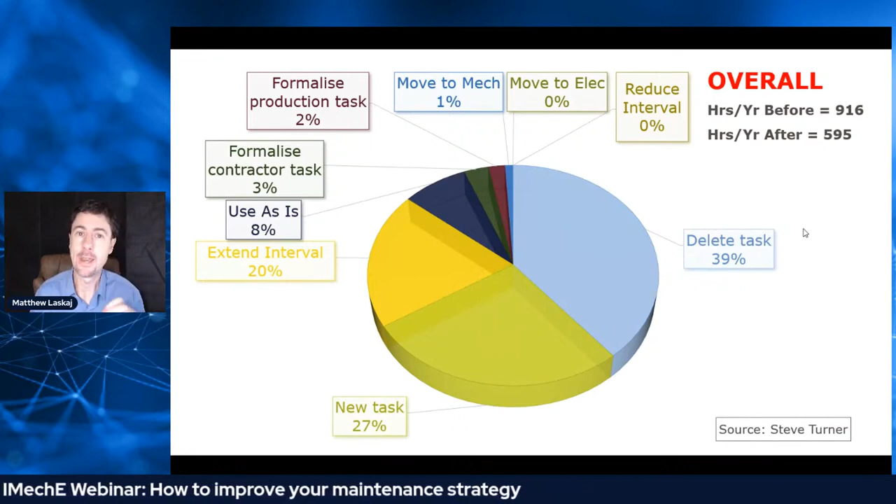Deleted 40% of tasks, increased a new task by 27%, and moved a few other bits and pieces around. Massive benefits, not only on cost, but also time. We've freed up a third of the work time that the maintenance team can do. Now we can get them involved in more proactive things like root cause analysis, better plans, making sure the stores are stocked better.

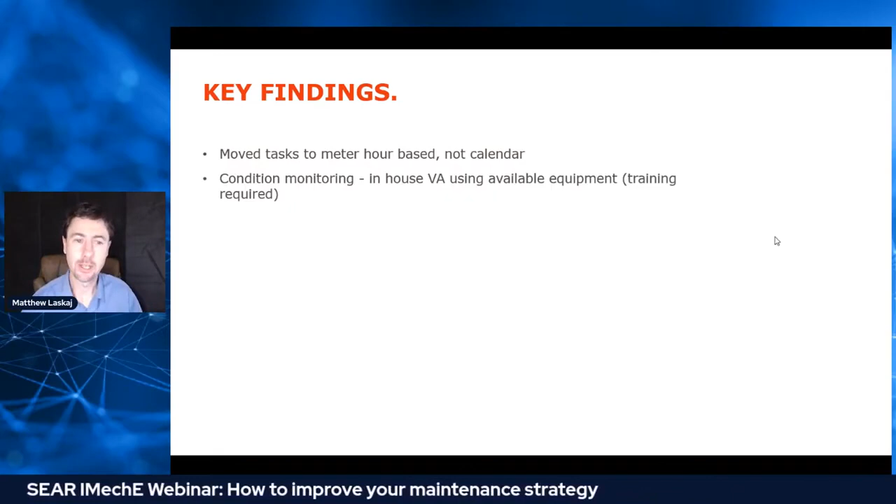The key findings were we moved things from calendar to hour. Out of the 7 production lines, they didn't all run 24 hours, 7 days a week. Some run 1 week, some run all the time. Do as much condition monitoring as is practical. Vibration analysis was a big one which we started doing. We did oil analysis on some of the really critical gearboxes.

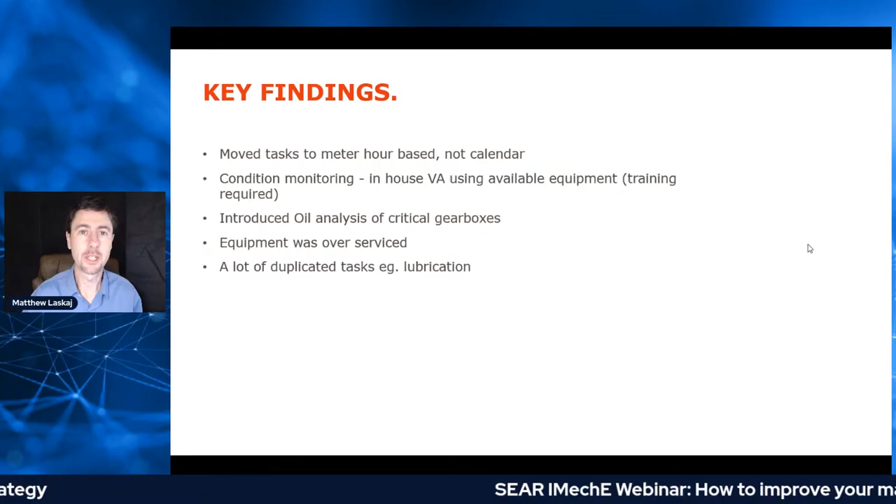We found that equipment was way over serviced. We just did too much maintenance for no reason. The operator would go and grease a bearing, and later on the same day the maintenance person would come and grease the same bearing. Too much duplication of tasks because it wasn't formally documented well. Not enough electrical tasks, and not enough that did the right thing.

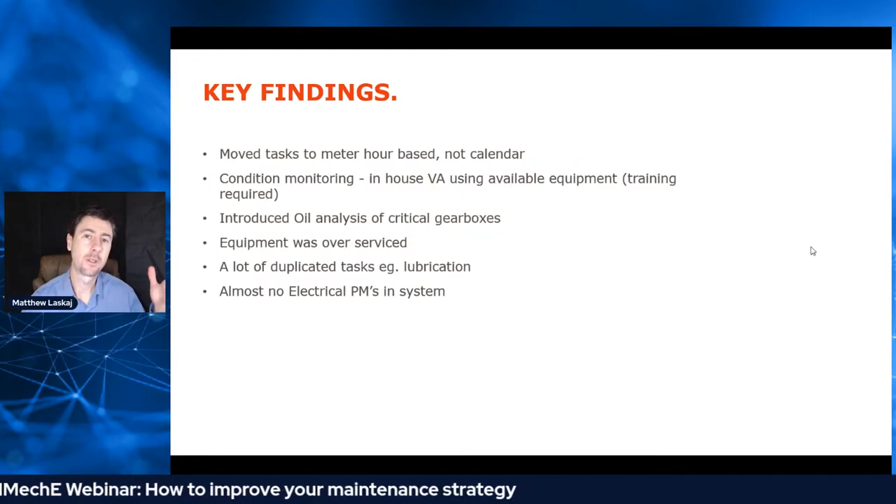So it's a huge amount of benefits you can see from there. All right, so that's a packing plant. A lot of you work in oil and gas. Like I showed you in the graphs, the results are really similar. It doesn't matter what industry you work in, the maintenance fundamentals are the same.

So here's a subsea example. We want to optimize the strategy, focusing on the rig itself, have some more realistic planned maintenance. We want to do the things that actually add value. Exactly the same steps: what's the failure modes, what's the consequence, what's the risk.

Remember the quote I said at the start. You can have a good strategy that assesses risk, involving the right people, making the right decisions. It doesn't have to be on critical things, you can do it on everything.

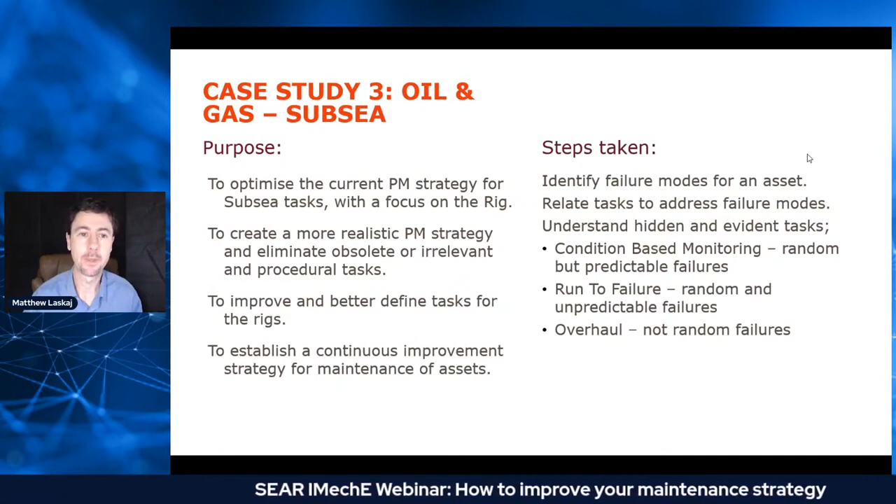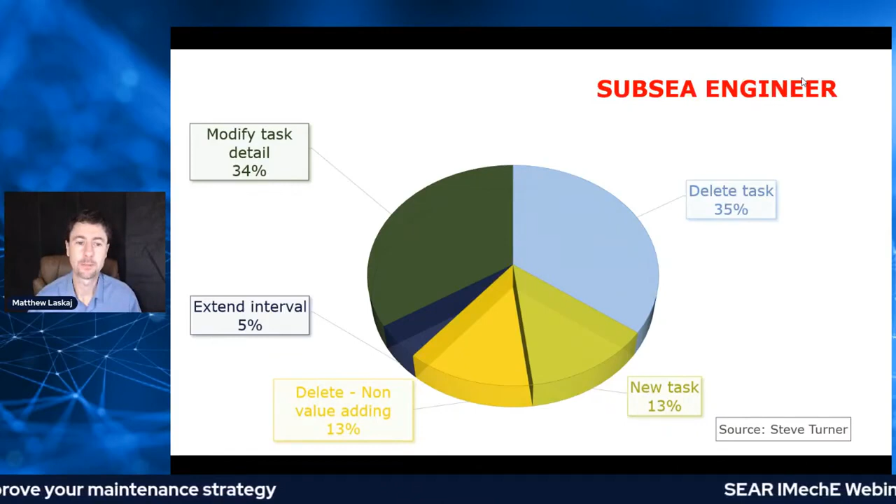Subsea engineers tasks, similar sort of profile here. Deleted 35% of tasks that they did. Modified 34%, so changed durations or changed a bit of detail. Added 13% new tasks, deleted 13% non-adding, non-value-adding ones. Pretty similar numbers to the last one.

Even though our maintenance management system, the CMMS, said that we had to do a planned maintenance, they would then go and do predictive maintenance. Or if it says no maintenance is required, they wanted to feel comfortable and still went out and did tasks. So the strategy wasn't being followed even though it was there.

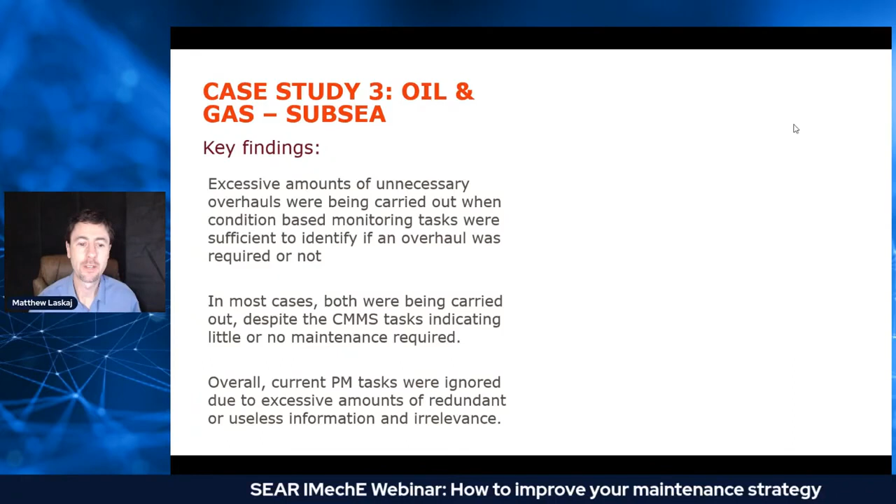Eliminated a huge amount of work that wasn't necessary. A more realistic plan of what tasks are needed. Add in the working, the man hours, the tasks performed. We've got a really good understanding of how we can plan, how we can schedule our work. Makes us more effective.

So what's next? Where do you go from there? We understand we could teach our teams through better training the fundamentals of maintenance. I find that a lot of people within businesses don't understand the fundamentals of maintenance well, they haven't been trained on it. Get the training in place well. We know how to put a strategy together through ISO 55001 maybe, or through our teams.

We can review criticality. Where do we go from there? What does the future hold for maintenance? Technology. Technology is going to help us massively. The Internet of Things, if you've not heard of the Internet of Things...

For those of you who go for a run and you use an app to track how far you ran, how many calories you burnt, how fast you ran, that's using the Internet of Things. It's using a sensor in your phone to go to the internet to give you the data to help determine how fast you were yesterday compared to today.

We can use the same thing for predictive monitoring. Vibration analysis: what was the vibration yesterday, what's the vibration today? We can have remote sensors so we don't even have to fly out to a rig to do the testing. Connectivity is making things much more accessible and much easier.

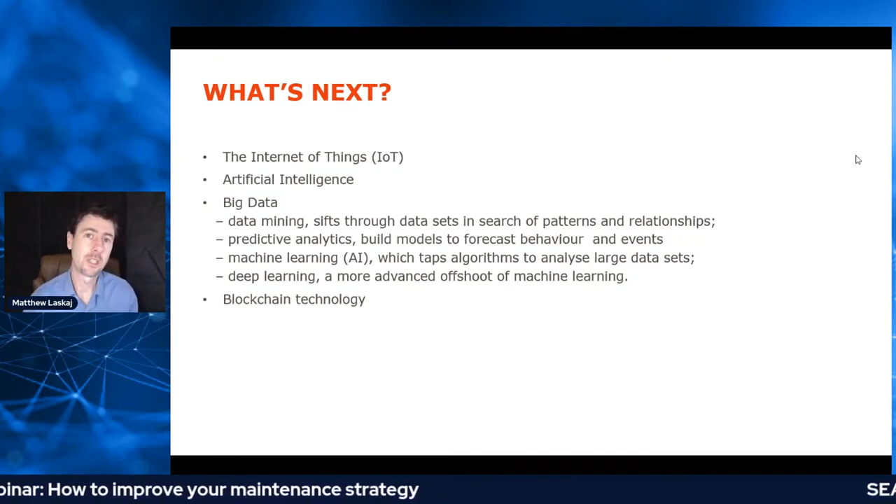We're monitoring transactions that are visible. Every transaction made digitally gets tracked so that nobody else can change the records. That's all blockchain technology is, in a very brief summary: visibility and traceability of every transaction that's made digitally.

Augmented reality, virtual reality - we can put goggles or glasses on to help us identify a piece of equipment, turn this valve, change this one. Here's a map of the floor. We can tell exactly where equipment is.

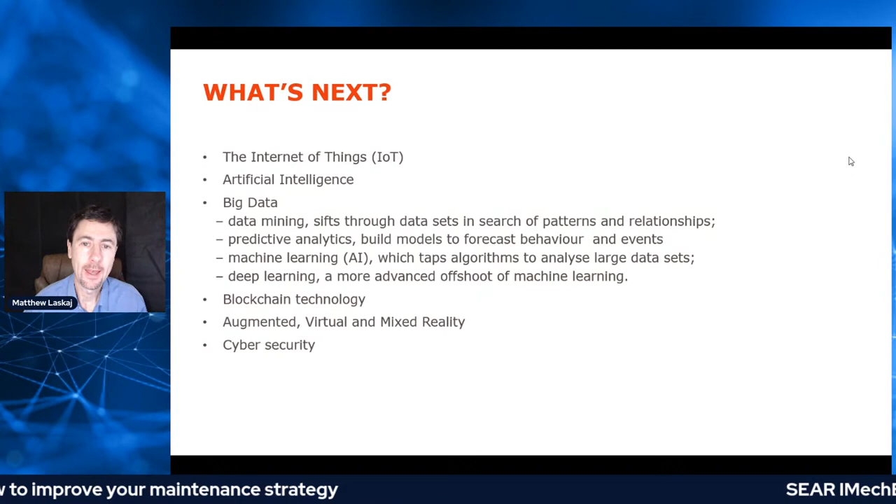Don't forget cybersecurity. How many times are companies going to get hacked before they decide to improve their cyber security? Data is what is important these days. We need to protect it, and make sure if we're using remote technologies and Internet of Things, we're protected.

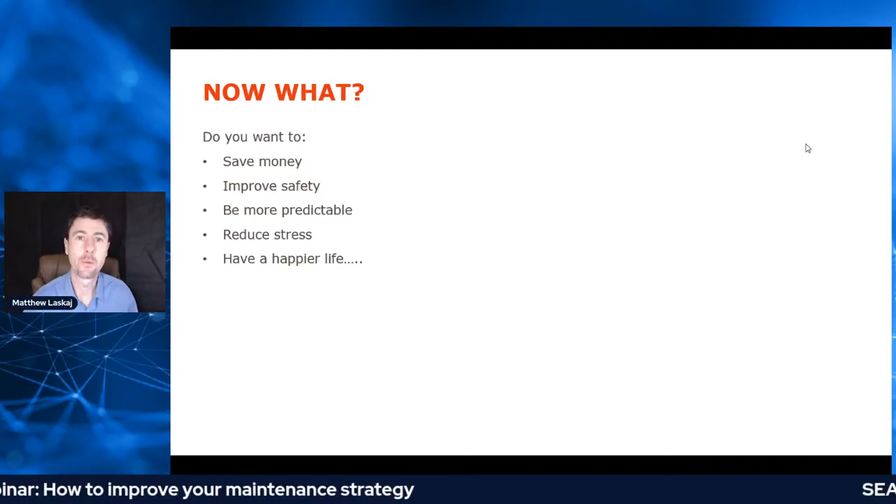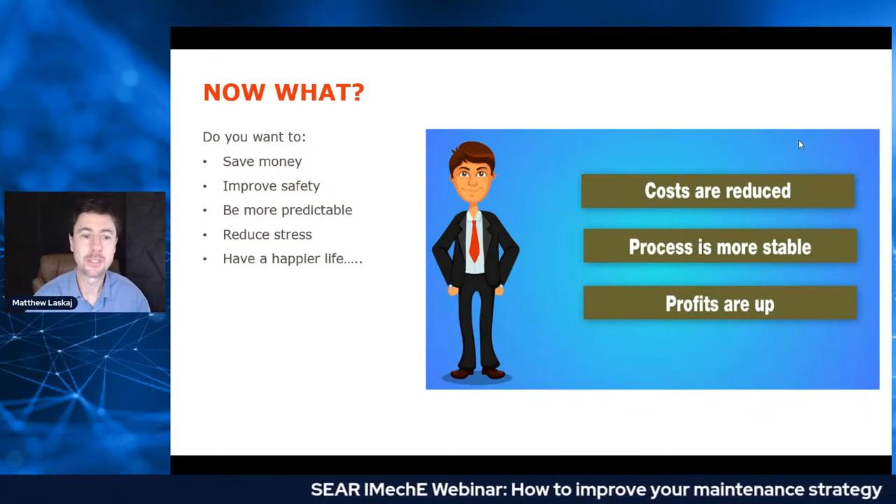So now what? What would you do if you wanted to save money, improve safety, have your equipment more predictable, reduce your team's stress, and have a happier life? What would you do to become this person I showed you at the start - this maintenance manager who's reducing costs, with a more stable process and profits up? I'm hoping you've got a bit of an idea now as to how you would do this. How can you become this person?

I asked you a question at the start: what are 3 steps that you gained out of today that you think would help you master your maintenance plan and reliability? If you haven't written them down, I'm going to give you my 3 answers.

First one is to set up the support that you need. We need the management support, the leadership, making the vision and setting the goals for the team. The support of the operators, total productive maintenance, providing that basic care, the condition monitoring stuff.

Don't tell production this, but maintenance and engineering are there to support production. We are there to help make money, which is production. We use advanced problem detection and solving skills, the techniques, the technology we understand, learning to support them - I'll deny it if you ever say that though.

Do the right things, understand the fundamentals and the basics. What maintenance techniques have we got to choose from? Reactive, planned, predictive, reliability-centered maintenance, total productive maintenance, risk.

And the third one: improve prevention as much as possible - prevention and prediction. Only use the new technologies once you have number 1 and 2 in place. You could have the best technologies in the world, but if you're not using the information, if you don't understand the decisions behind it, you're wasting your money and wasting your time. Most places are nowhere even close to number 3. Start at number 1 and 2 first to help get you there.

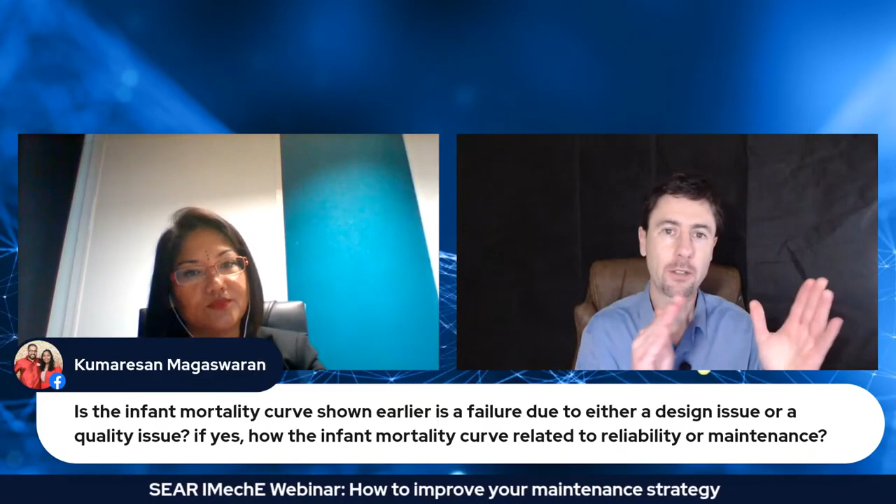Okay, one last question before we end for the day. This is about the curve you showed earlier, about the infant mortality curve. So is it due to a design issue or a quality issue? How is it related to reliability or maintenance? Yeah, great pickup there. So the infant mortality graph says there's a higher chance of failure at the start, and then it fairly quickly evens off to random throughout its life. That's what that kind of curve tells us.

So what are all of the ways it can fail on day one or day two when you start it up? Yes, we could have designed it poorly. We could have transported it badly and dropped it. We could have stored it in a room that wasn't suitable, if it was electrical it could have been humid and got wet and rusted. It could have not been protected well. The operator could have installed it wrong. The operator could have started it up wrong. There's a massive list of things that could cause us to fail the first time.

So that helps us make sure our process is in place for that startup process. But by understanding the graph, as a reliability or maintenance or engineering person, it makes me think every time I say we need to do maintenance, do we really need to do it? Because if we do, we're going back to the start of that graph, and now we're back to the higher probability of failure. So as a reliability person, the way that graph helps me is to actually make me think better: do I really need to do this task? Does it help me reduce the consequence, reduce the risk, prevent the failure? If not, redesign it or just let it run to failure. Don't even touch it at all, because like the light bulb, touch it and you're probably going to blow it. Leave it, let it have a way to fail. So that's how I use that.